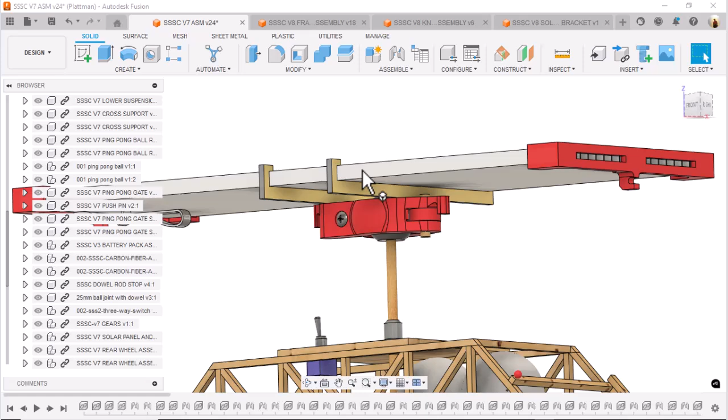Okay, checking where we are right now. What we're having to try to accomplish right now is to design the solar panel mid-mount bracket. That is this guy right here, this bracket. We need to design him. It's not a very hard part to do, but that's the next one we need to design.

If you go look at our assembly, that will actually mount on top of this knuckle, as you see here. I've gone ahead and opened up that knuckle assembly, so we'll place it in here, and thus it'll be part of this sub-assembly of this knuckle. So let's go back and take a look at this bracket.

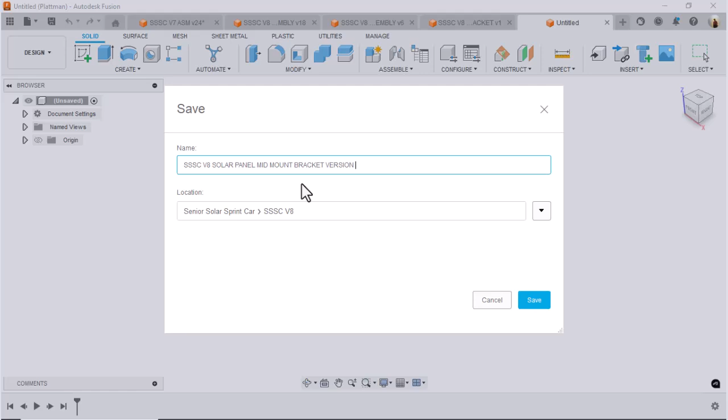Let's create a new file, and in the new file I'm going to do a save, and I'm going to say SSSC V8, Control V. I'm going to say version 2 because I've already created this thing a couple times. And we'll right mouse click over here, save as component, come back over here, highlight this. This is SSSC V8. I didn't make a copy of that. And we'll say version 2. Okay, so we've got that created.

Now let's go get some measurements on it. Okay, first of all, let's look at the orientation. We've got a front view here, and we got a right view there. So it looks like we do it on the right plane. Okay, no problem. Let's get a quick measurement. Let's use our inspect command.

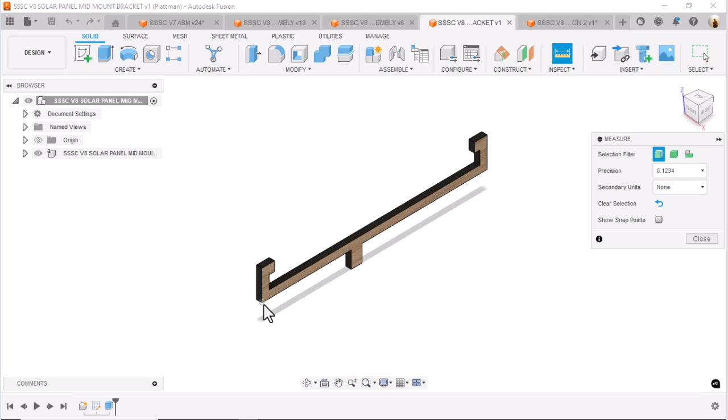Go from here to there, and that says it's a 123.5. I'll copy that to the clipboard, and let's go and hit reset on this. Measure from here to there, and that appears to be 16 millimeters. Okay, we can do that.

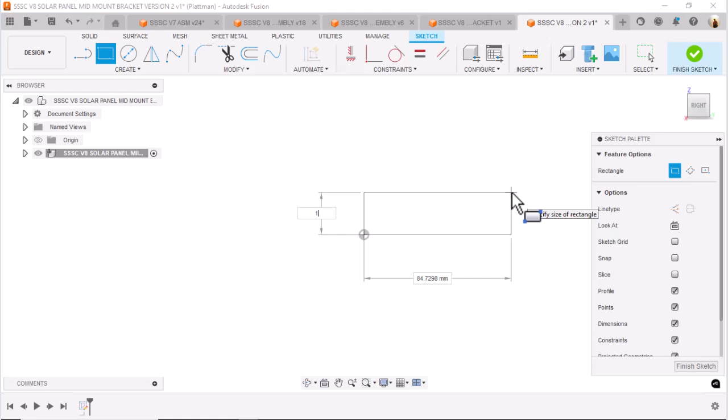So we'll come over here and do a new sketch. We'll do it on the right plane, and we'll get a rectangle, and we'll come out here like this. And I think that was 16 millimeters. Hit the tab key, Control V, and that gets us that size we need. Excellent. Okay, so now let's continue on.

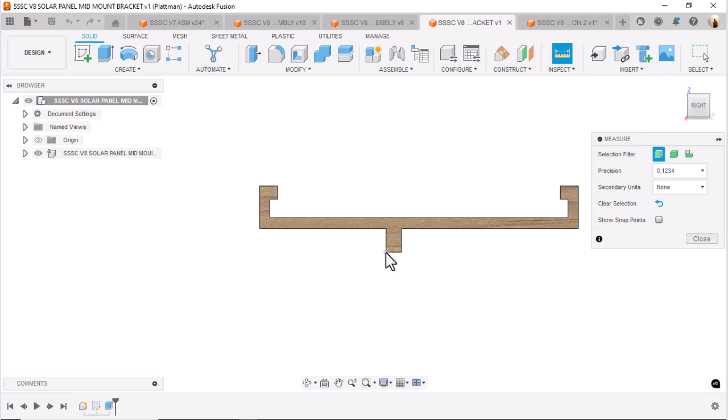We're going to go ahead and go back to this bracket, and I'm going to go ahead and do this front view like that. And let's catch a measurement from here to here, and that says 49 millimeters. I think I can remember that. So let's go ahead and do a measurement from here to there, and hit reset on that. Here to there, 9 millimeters. Okay, here to there by 6 millimeters, 9 by 6.

Okay, so we'll come over here and we'll just draw us a rectangle. Let's make sure we're collinear to that, and we're going to say that length is 9. Tab key, hit 6. Okay, put that in. Looks like we got that in successfully. Let's double check that measurement real quick. Hit the I key for inspect. Here to there. That's 6 millimeters.

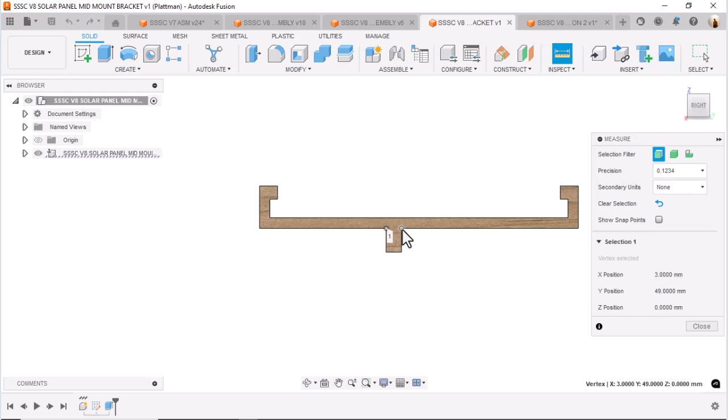That looks good. Okay, hit reset on that. Here to there. Let's do a reset real quick. Here to there, 6 by 9.

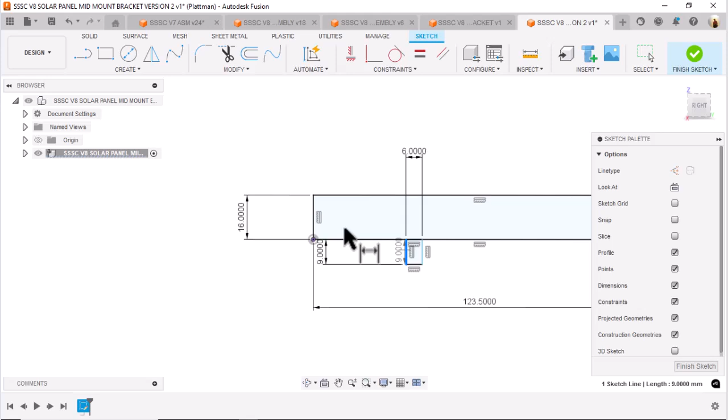Okay, so now what I'm going to do is roll up on this, hit a dimension from here to there. I'm going to set that to 49 millimeters. Whoops, not 19. 49 millimeters. Hit enter. Let's move that over. I'm going to take this top dimension here and just pull that down so it's kind of out of the way. So it looks pretty good.

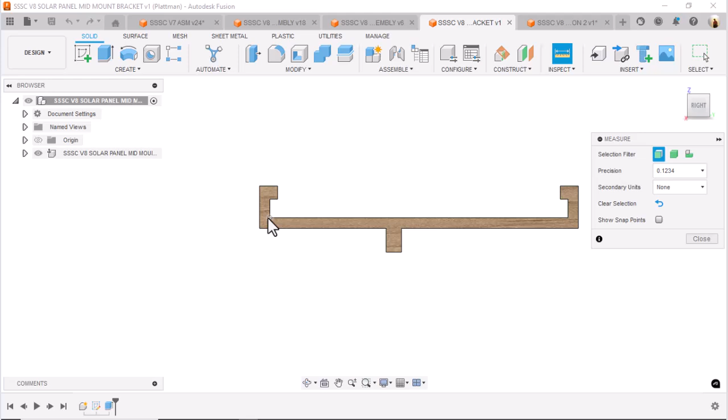So let's go ahead and go back to the bracket, and let's catch this interior dimension right here. So we're going to go get this interior dimension from here to there. That's 115.5. I'm going to copy that. I'm going to reset and measure from here to there. Whoops, reset. Measure from here to there, and that's 7 millimeters. So 115 by 7. Okay, I think that's what I said.

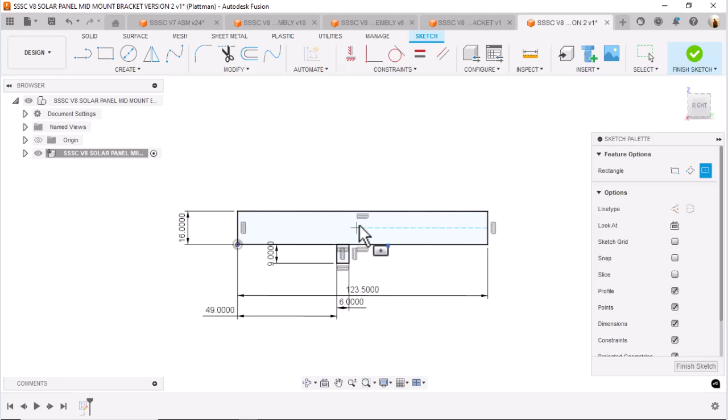Now to make sure that that's centered in there, I'm going to do rectangle by center. I'm going to go find that midpoint and get it to highlight. There it is. Get this midpoint here to highlight. So when I come across, it'll find that midpoint, and then I'll do a 7. I'll hit the tab key, Control V, put that in there. Yeah, it looks good. All right, making progress.

Now, just to get ahead of myself a little bit, I'm going to go ahead and hit the trim command, which is the T key. Trim out that. Let's go turn those constraints off. Got that out of there.

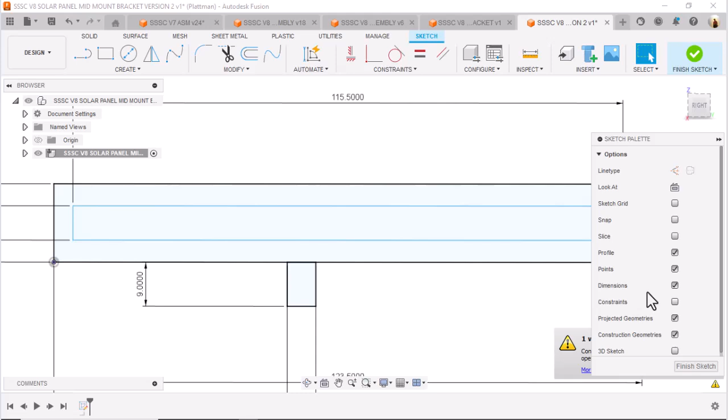All right, now let's go back over here and look at this thing again. Let's do a inspect again. I'm going to measure from here to there. Okay, that's 109.5. Let's copy that to the clipboard.

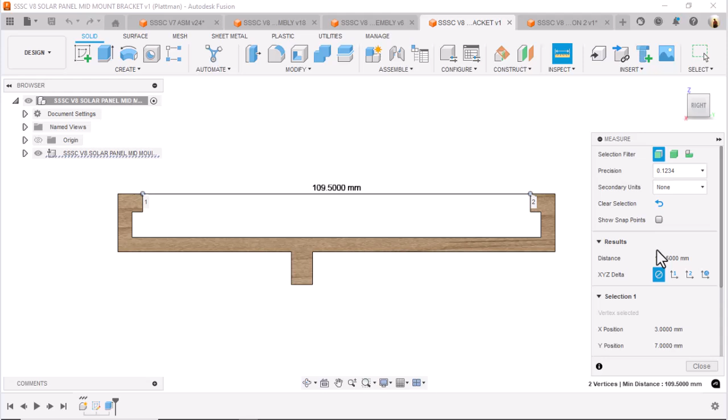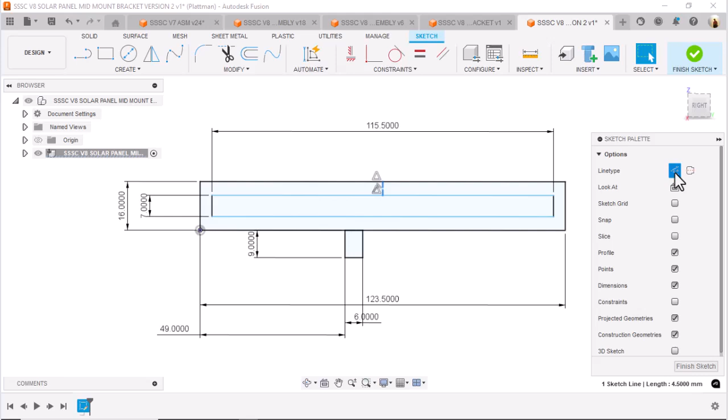I think that's going to be pretty easy to do. So what we will do is we'll go back to this guy, and we'll come in and put us a midpoint. Find that midpoint here to there. We hit the X key, make that a center line. Okay. Hopefully I'll make that a center line. Tell you what, let's make it a construction line. Yeah, easier to see. Okay, so we'll do another rectangle by center.

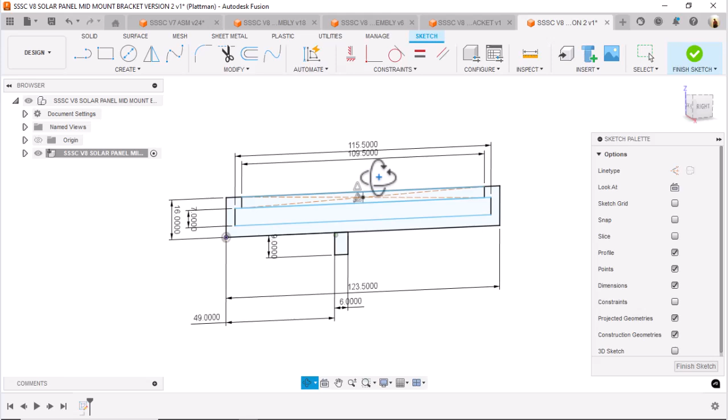We'll snap to this, definitely snap to that. I'll hit my tab key, do a control V, put that guy in there. Nice, okay, so we've got him in there. We're almost done, so let's go ahead and hit the trim command. Trim all this out, don't need that. Get rid of that center line. Take out these two points here. Wow, that looks good, okay.

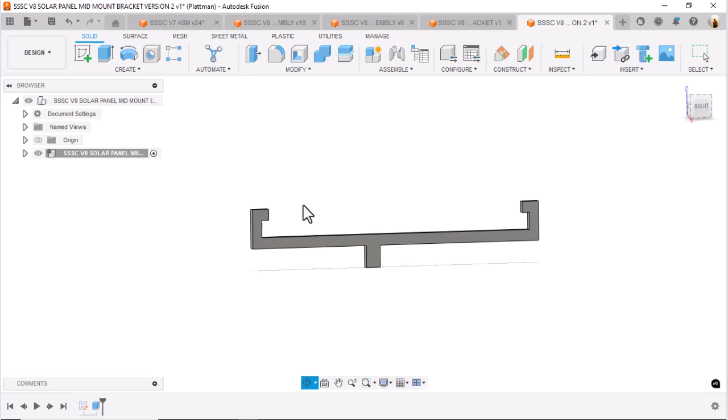So let's go ahead and hit our E key while we're still in the sketch. We'll say 3 millimeters, extrude that 3 millimeters. Rotate that down, looking nice. Let's double check this dimension right here to right there.

7 millimeters. Go back over here to this. I'm pretty sure that's correct, but let's double check. Yeah, 7 millimeters, awesome. Alright, coming back over here to this guy, let's go ahead and hit the A key to put our texture on there.

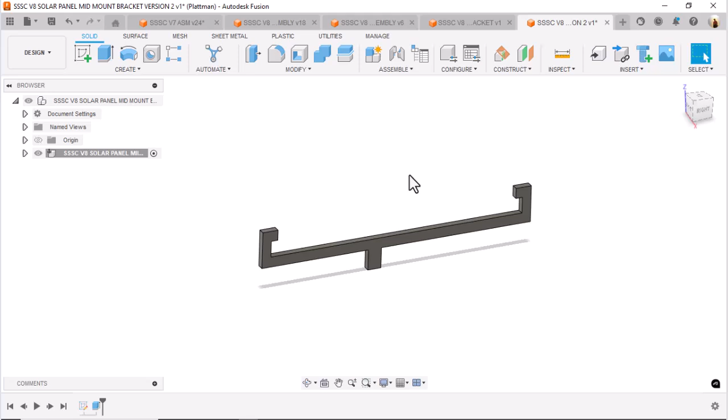And I'm going to move this over so you can see it a little bit better. I'm going to go to my appearances, favorites. Let's grab the old favorite of semi-gloss 3D maple. Okay, it's on, and I'll go ahead and hit close.

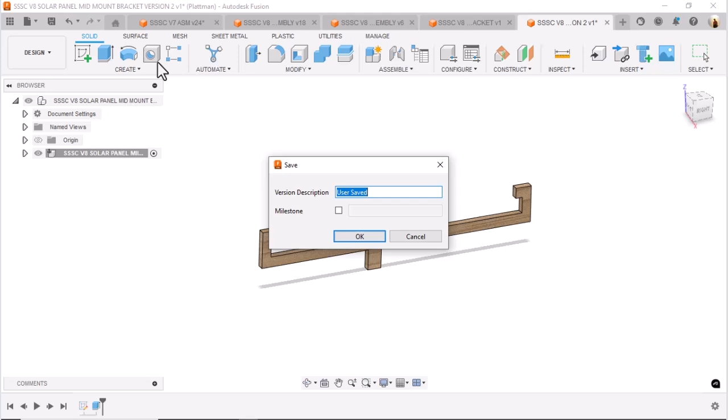I'm liking that, so let's go ahead and hit a save. So we'll go ahead and do Control S. Control S, tab, spacebar. Okay, got that in there. Alright, let's go ahead and close this one because I don't need it anymore. So we got this version 2. We'll come back over to the knuckle assembly.

We'll open this up, look at our parts library. We'll grab this guy, yeah, you can see I've already created several of these. I'm going to put him in there. Now we're going to have to rotate this around, so we're going to go ahead and rotate this around.

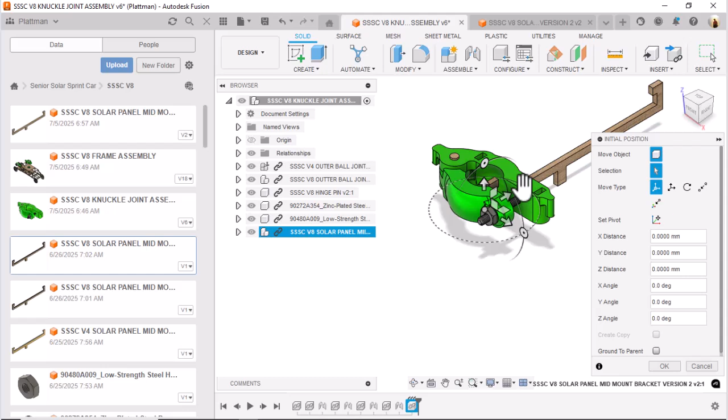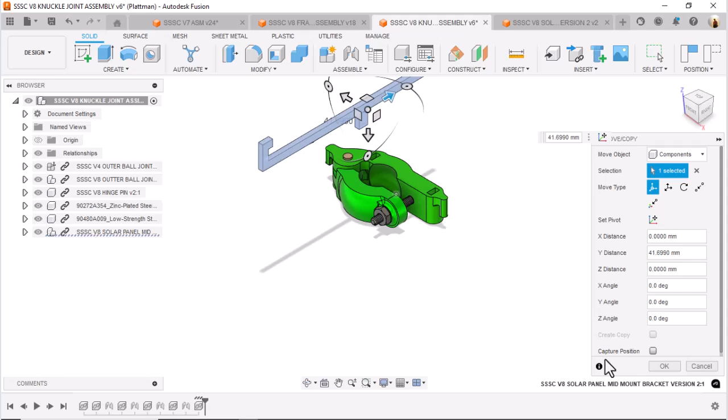I'm just going to get it started. I'm going to say negative 180. And I'll take this guy here, hit the M key for move, and I'll make sure I'm set to a component. Grab that, scoot it up here, kind of pre-position it a little bit. And we'll come over here and we'll say OK, and we'll close this off. Hit OK, rotate this up like this.

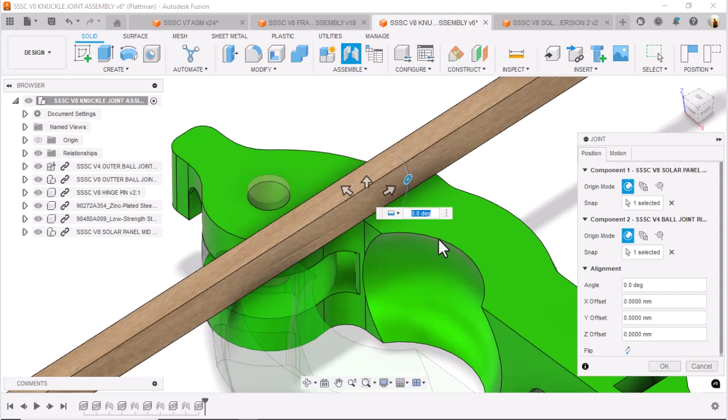Hit the J key for joint. Again, the joint key is this right here. Snap to the very middle of this right there. Scroll out, scroll down, scroll over here to this. Snap right there, and it should place it in place. Yeah, it looks good, let's double check this. Turn it around.

Yeah, you want to kind of be off center because this the way we joined this it right here, so that way it kind of centers up the solar panel. Go back to this, accept that joint. Let's go put another one in.

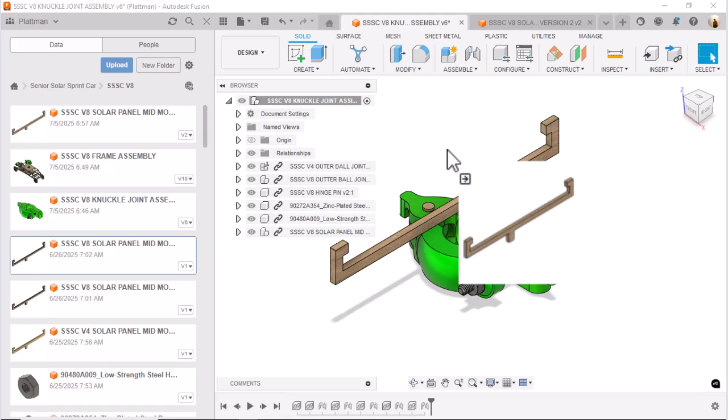Grab him, stick him over here, and again we'll rotate him around, get him started. We'll just highlight this. Okay, Control A, negative 180, and in. We'll pre-position that by using the move command, make sure we get set components. It's good, move this up here.

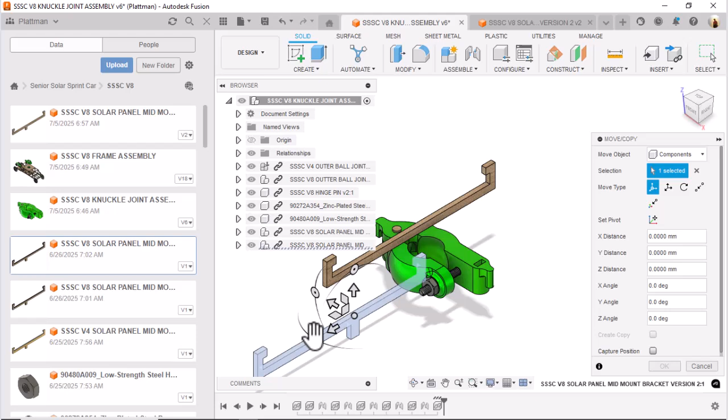Same song, second verse. Hit the J key to join. Find that center on that edge. Rotate around, come over here. Put it right there, wonderful. Zoom out. Alright, so we got that in there.

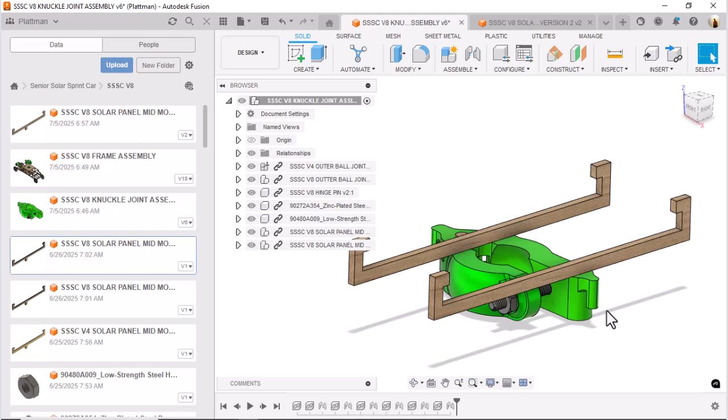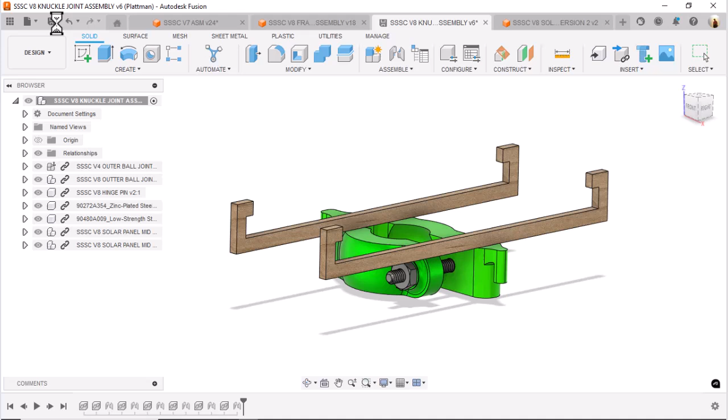Okay, now that we've got our two mid-mount brackets supported for the solar panel mounted on this, the next thing that would make a lot of sense is let's go ahead and back over here and save this real quick. We'll save that, okay, tab, spacebar to save that. Come back over here, we should have our caution sign. There it is, and that'll come back in and show the two brackets mounted in there.

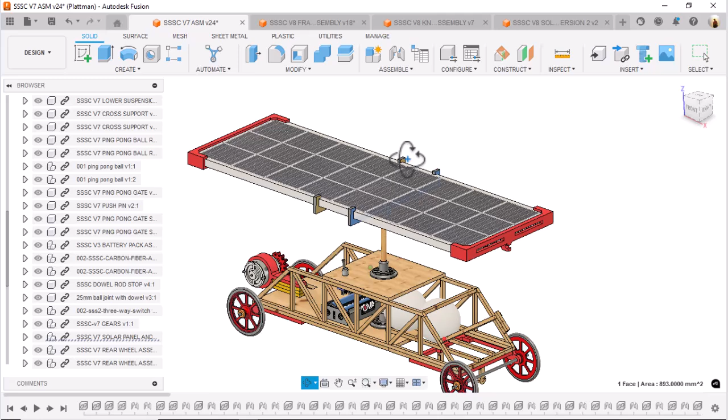So obviously the next thing we need to do is we need to design the solar panel itself. So we'll come back over here to the solar panel and we'll take a look at him. And now, if I'm not mistaken, this is an assembly. I'm going to click on this and let's see right here, turn this off. Yeah, turn that back on. It is an assembly. What I'm going to do is go ahead and open up that solar panel and let's take a look at him.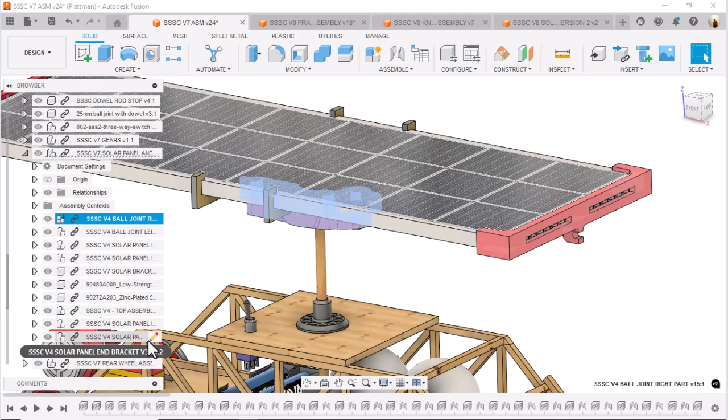Solar panel, right? Those are the brackets. More brackets here, the pin, ball joint. Okay, let's roll down here. Looks like the solar panel and bracket there. There's the solar panel and bracket there. Okay, let's go ahead and open that as well. Do a right mouse click and open.

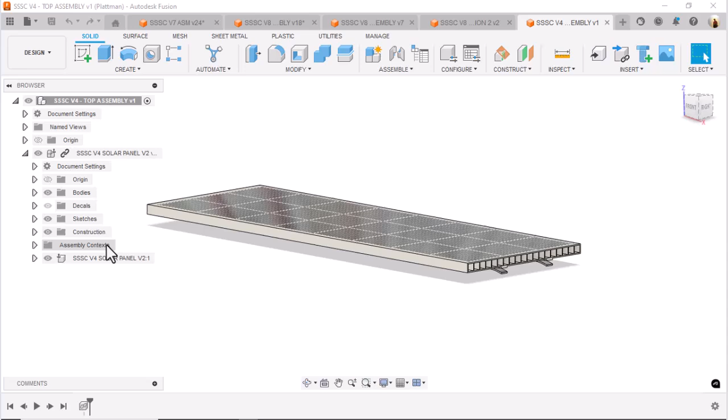Let's take a look at him, because that's the next thing we need to design, is this guy right here. Now I designed this as an assembly with subcomponents. Okay, no, actually it just looks like it's this one part. So we're going to come back and now design this right here so we can mount it onto our solar car.